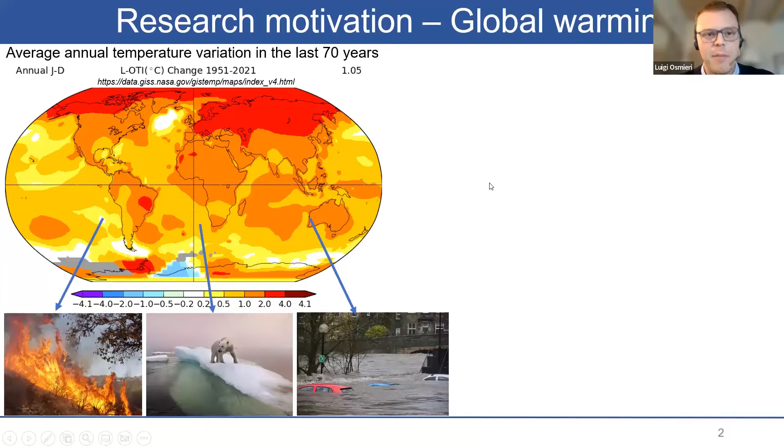So I would like to start by mentioning global warming, which is a great issue for our planet, with a lot of bad effects that are every day more evident. And the main way that we have to fight and mitigate the impact of global warming is to try to reduce the emissions of carbon dioxide in the atmosphere, which are primarily due to the production of energy. So there's a need to decarbonize our energy production system.

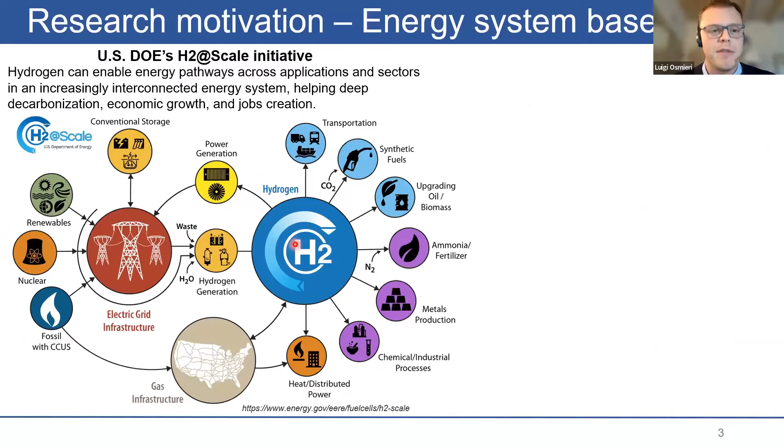And recently, the United States Department of Energy has developed the so-called Hydrogen at Scale initiative with the goal of integrating hydrogen in the energy production system and in the economy, with the goal of helping decarbonization, and which can also have a great impact for economic growth and job creation.

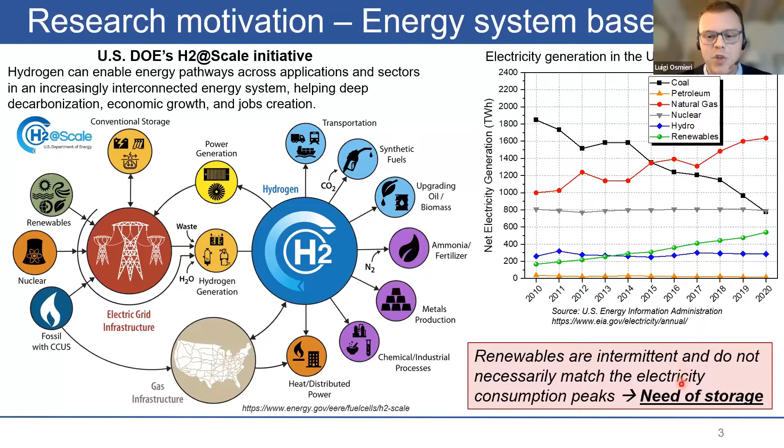We can see from this plot how the electricity produced in the United States using renewable sources over the last decade has increased. However, the renewables are intermittent. Let's just think about the solar and the wind, and they do not necessarily match the electricity consumption peaks. So there is a need to store this excess electricity produced by renewables.

And one of the ways is to use the electricity to generate hydrogen via low temperature water electrolysis. So in a water electrolyzer, we can split the water molecule into hydrogen and oxygen without any emission of greenhouse gases. The only byproducts are the oxygen and the hydrogen that, after being generated, can be stored and then used later on when we need to produce more electricity in a low temperature fuel cell.

So the electrolyzers and fuel cells are electrochemical energy conversion devices that can operate at close to ambient conditions, enabling the fast startup and shutdown of the systems. However, to operate with high efficiency, they need catalysts to enhance the reaction kinetics at the electrodes.

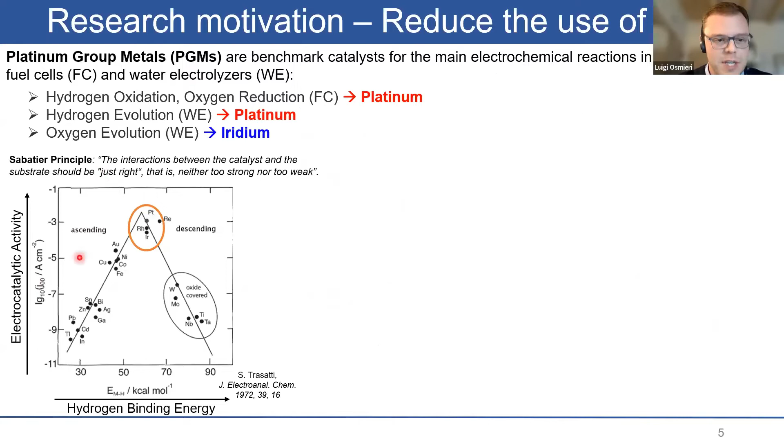Unfortunately, the best catalysts for all the electrochemical reactions involved in low temperature fuel cells and electrolyzers are the so-called platinum group metals. As we can see from this plot, they are the ones that show the best activity. But unfortunately, they are very expensive materials.

Another drawback of these materials is that they are mined in just a few locations in the world, mostly concentrated in South Africa and Russia. So trying to replace these platinum group metals with catalysts made of more earth-abundant elements will help both in reducing the cost of fuel cells and water electrolyzers, but also in reducing the dependence on import from other countries.

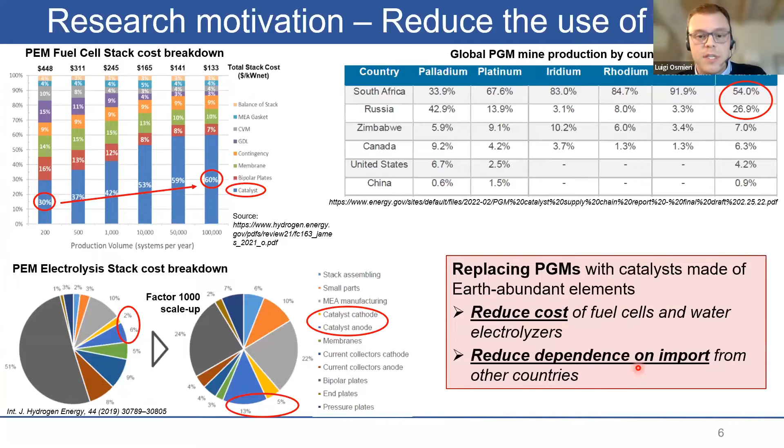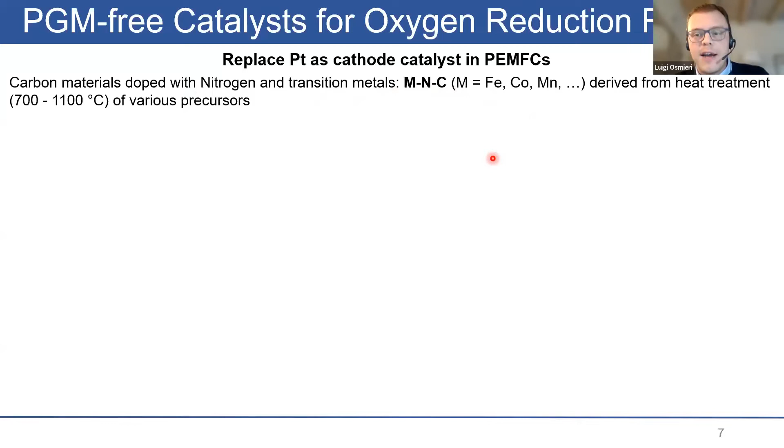I would like to talk now about my work on the development of PGM-free catalysts for oxygen reduction reaction, with the goal of replacing platinum as the cathode catalyst in proton exchange membrane fuel cells. Talking about these materials, we have to mention that they are carbon-based materials doped with nitrogen and transition metals like iron that are derived from heat treatment of various precursors.

But they are substantially different compared to the traditional platinum on carbon catalysts, primarily due to the different active sites: in platinum catalysts, basically platinum nanoparticles dispersed on carbon support, while in these materials, the active site is an atomically dispersed transition metal atom coordinated with nitrogen in a carbon matrix. In addition to this, they are also substantially different in terms of morphology, interaction with ionomer, and the catalyst layer structure in the electrode.

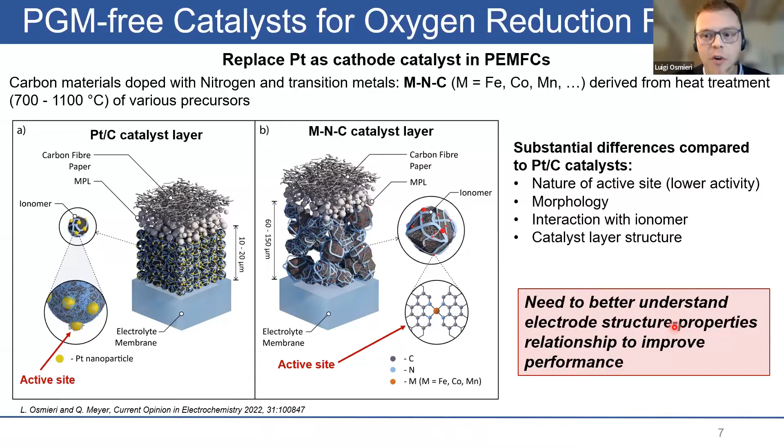So there is a need to better understand the relationship between electrode structure and properties to try to improve their performance. The first work that I would like to mention is the study of the oxygen reduction reaction kinetics of an iron-nitrogen-carbon catalyst applied on the cathode of an operating fuel cell.

Here, we try to propose a modification of a previously established equation that relates the availability of the active sites as a function of the cathode potential. We propose the insertion of two experimentally measured parameters: the iron oxidation state, measured by X-ray absorption, and the redox potential, measured by cyclic voltammetry.

After inserting this modified expression of the availability of active sites into the overall kinetic equation, we validated the model by fitting different experimental data collected over a range of operating conditions like pressure, temperature, and cell potentials, obtaining a good fitting of the experimental data.

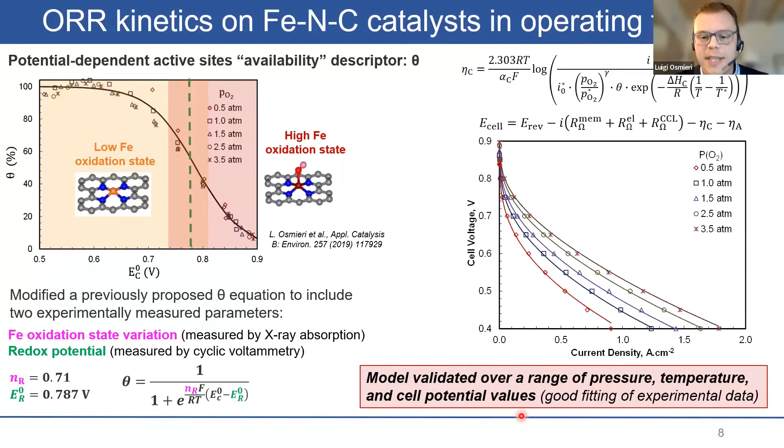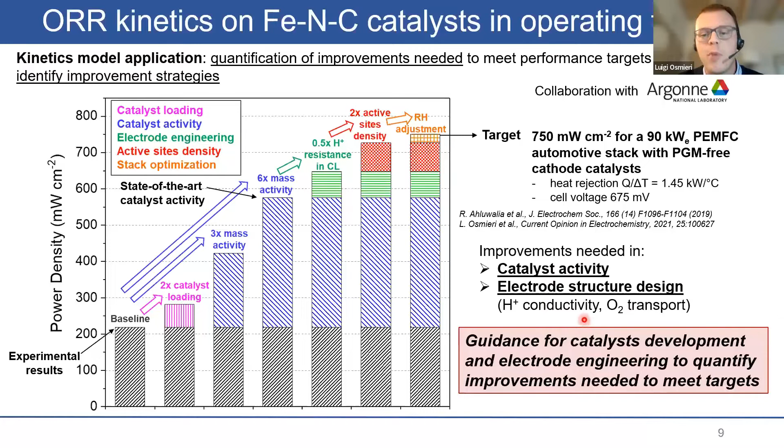Later on, this model was applied through a collaboration with a modeling group at Argonne National Lab in order to quantify improvements needed to meet certain performance targets that were set for fuel cells operating with this PGM-free catalyst. And in particular, we found out that improvements are needed both in the catalyst activity, but also in the electrode structure design to improve the proton conductivity and the oxygen mass transport.

So talking about electrode engineering and electrode design, when we prepare an electrode, we basically mix the catalyst with an ionomer and disperse it in a solvent in order to create an ink that is then deposited on the electrode.

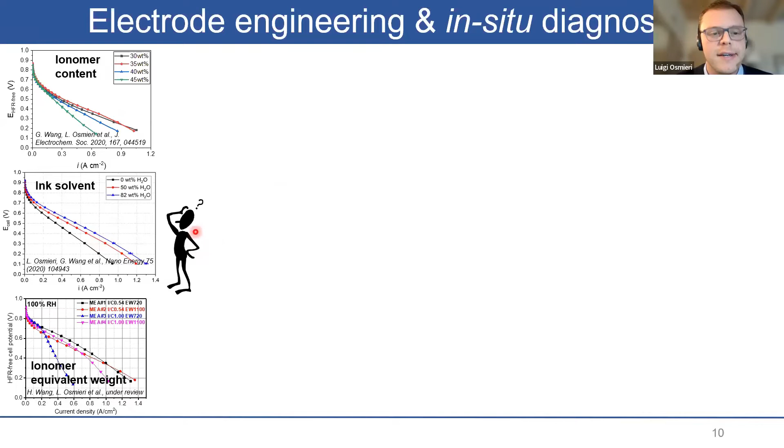We can play with different variables like the ionomer content, the ink solvent composition, or even the chemistry of the ionomer, and we obtain different performances which are not easy to explain, depending also on the operating conditions.

So I developed two methods to quantify the mass transport resistance in PGM-free electrodes based on limiting current. The first one was based on the hydrogen oxidation limiting current that does not consider the generation of water in the electrode. And then a second one was based on oxygen reduction reaction limiting current, which considers the water generation and can be more conveniently applied when this water generation is a more limiting factor for mass transport.

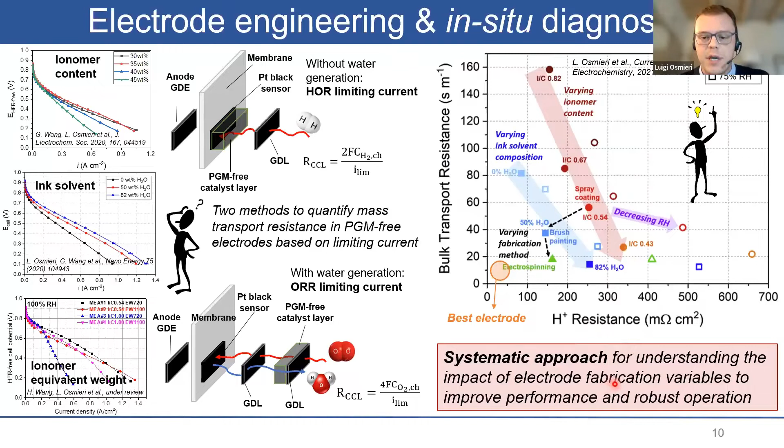Finally, I summarized the results of all the experimental tests done, changing different variables of the electrode fabrication to demonstrate that for getting the best performing electrode, we need to find a good compromise between minimizing the gas phase mass transport resistance and the proton resistance in the catalyst layer. This represents a systematic approach proposed for understanding the impact of electrode fabrication variables to improve performance and expand robust operation.

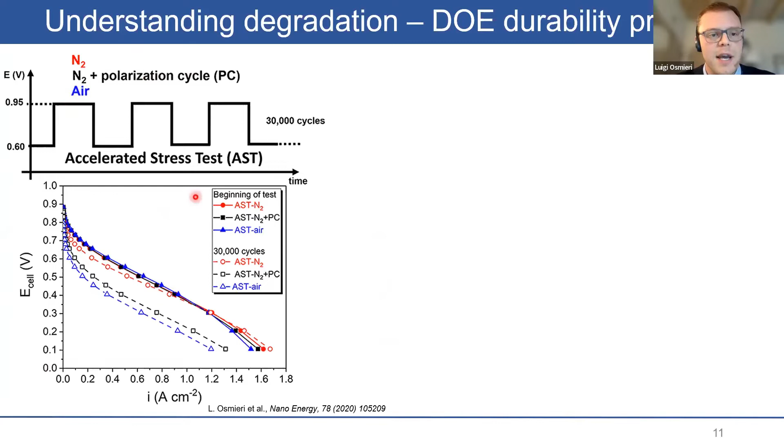Another important aspect is understanding the durability of these materials. They undergo degradation over time, and so far there has not been a universally adopted method for testing the durability of these materials. So I have tested the durability under several different operating conditions and found out that regardless of the operating condition, a good clear correlation was found between the degradation and the loss of the iron in the catalyst, and also the increasing oxidation of the surface, which all go together with the decrease in the cathode kinetics.

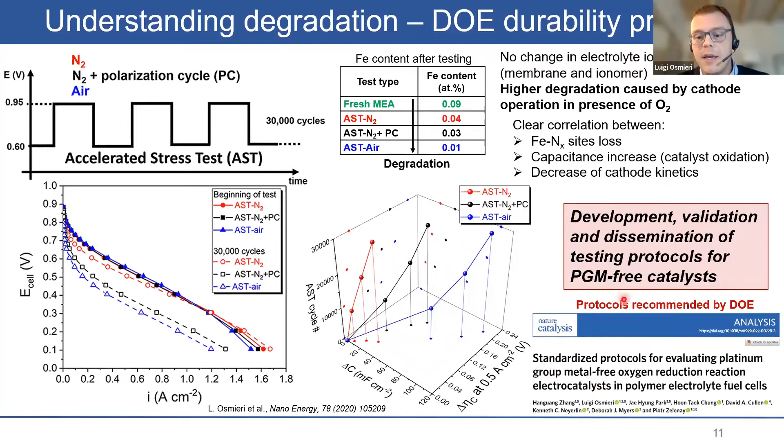So this work was used as the base for future development of standardized protocols that were then validated and disseminated, and they are now recommended by the United States Department of Energy as a testing protocol for assessing the durability of the PGM-free catalyst. And they were also published recently in Nature Catalysis.

I would like to move forward by talking a little bit about my work related to PGM-free catalysts for oxygen evolution reactions, so with application to low-temperature water electrolyzers. Currently, the two main technologies for water electrolysis are liquid alkaline electrolyzers that can operate with PGM-free catalysts, but have the drawback of operating with highly concentrated alkaline solutions and at low current densities. The other competing technology is the proton exchange membrane electrolyzer, which operates with pure water and at high current densities, but has the drawback of only working with the PGM catalyst.

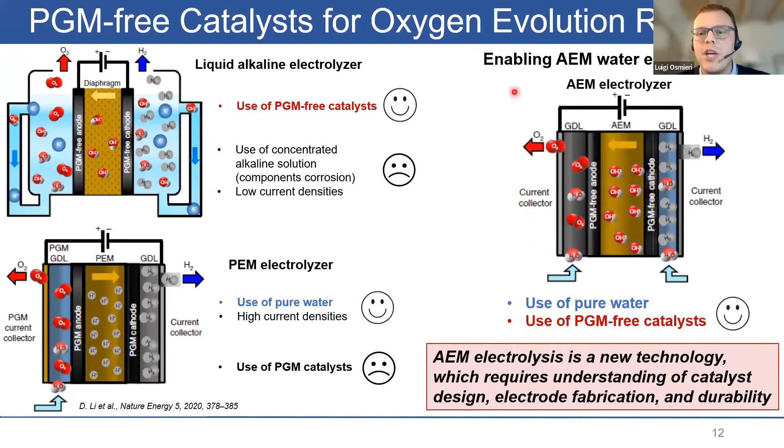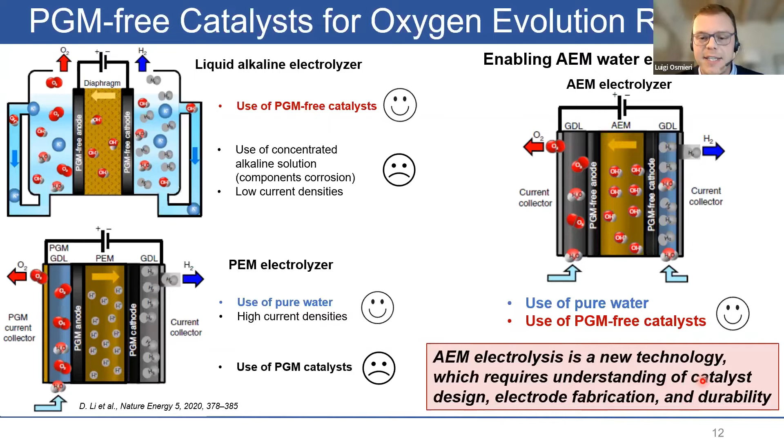Recently, the development of more performing anion exchange membranes can enable the operation of a new technology, the anion exchange membrane water electrolysis, that can combine the advantage of the previous two, so operating with pure water and also with PGM-free catalyst. But since it is a new technology, it requires understanding of the catalyst design, electrode fabrication, and durability.

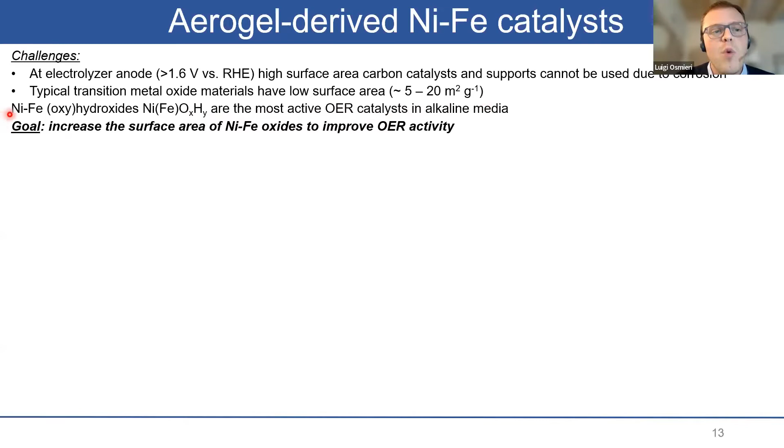The first challenge that we have is that we cannot operate using high surface area catalysts like the ones based on carbon, because the anode of the electrolyzer operates at a high potential, and then these carbon materials will undergo too fast corrosion. On the other hand, the typical catalysts used are transition metal oxides that have low surface area. So knowing that the nickel iron oxide hydroxides are the best and most active catalysts for oxygen evolution reaction in alkaline media, we wanted to find a way to increase their surface area to improve their activity.

So I developed this method based on aerogel synthesis, which consists in creating a gel, nickel iron oxide gel, and then drying it in supercritical conditions to keep the gel-like morphology and obtaining this very high surface area oxide with surface area above 400 square meters per gram. When testing it in a liquid electrolyte cell, we found out that the activity of a lot of these materials is way higher compared to iridium oxide, which is the benchmark PGM catalyst for oxygen evolution reaction. So we expected promising results for the testing in an operating electrolyzer.

However, we faced issues when fabricating electrodes with these PGM-free catalysts, because we found out that when they are exposed to deionized water, they tend to detach from the electrode. And so we proposed the addition of a binder in the electrode formulation in order to prevent this problem. When testing, we found out that changing the formulation of the ink in terms of binder content and ionomer content, the performance in DI water was varying a lot, which didn't happen when testing with a supporting electrolyte solution like 0.1 molar potassium hydroxide.

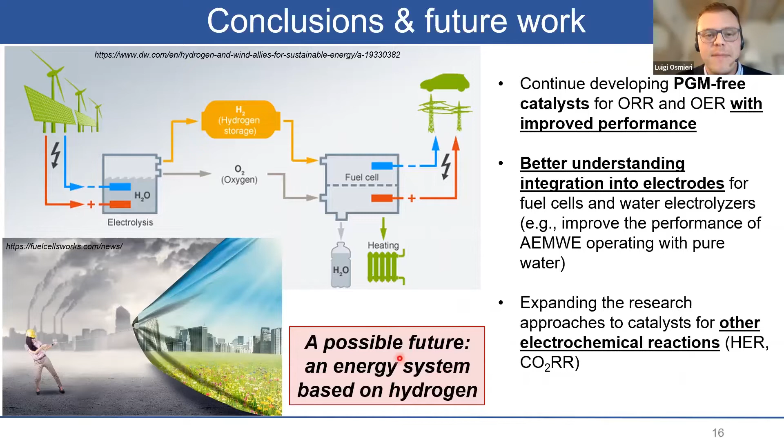Finally, I would like to conclude by saying that continuing to develop PGM-free catalysts with improved performance, better understanding their integration into electrodes, and expanding these research approaches that I propose also to other catalysts for other electrochemical reactions, will give a boost to a possible future in which the energy system will be based on hydrogen.

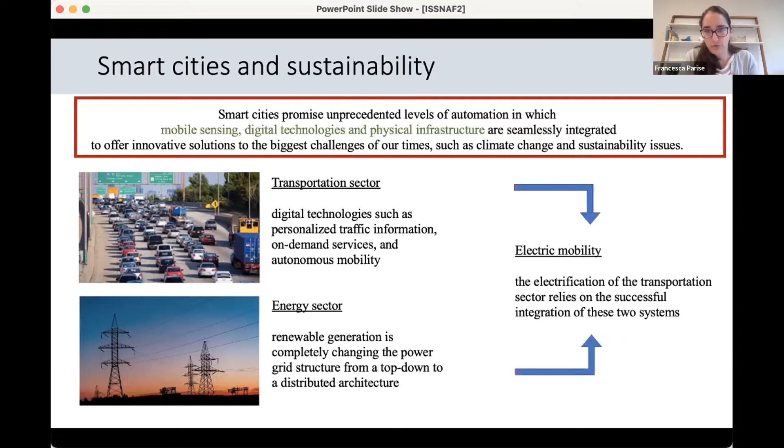And also if we think about the energy sector, especially with the integration of renewable generation, which is changing the power grid structure from a top-down to a distributed architecture. And at the intersection of the two, we have electric mobility, which also offers great promises for the future. Now, one point I want to make is that the success of these technologies really requires the development of novel modeling and control paradigms to enable their efficient, reliable, and safe operation. And this is the area of research where I focus in my group, which tries to propose mathematical modeling to understand how these smart cities operate and how we can make them more efficient.

And the challenge is that these are complex systems, so we need a number of tools from different disciplines, from network theory to model the underlying physical infrastructure, to control, machine learning, and optimization, if we want to understand how to make the system more efficient. But what I'm going to argue in this presentation is that we should not forget that the main component of smart cities is the people that live within them. So we should also think about how to model human behavior and how these people interact with the underlying technology. And I want to argue that the way to do that is through the lens of game theory. Game theory is a science that allows us to understand how people make strategic decisions.

And so to give you a little bit of a primer, suppose you have a population where you have a certain number of agents, and each one of these agents need to make a decision, which is what I'm here denoting by xi. So this is going to be the decision of agent i in my population. And when I say that agents are strategic, what I mean is that their objective here is to make the best decision to maximize their interest, which means that they want to, for example, minimize a cost function that depends on their decision xi.

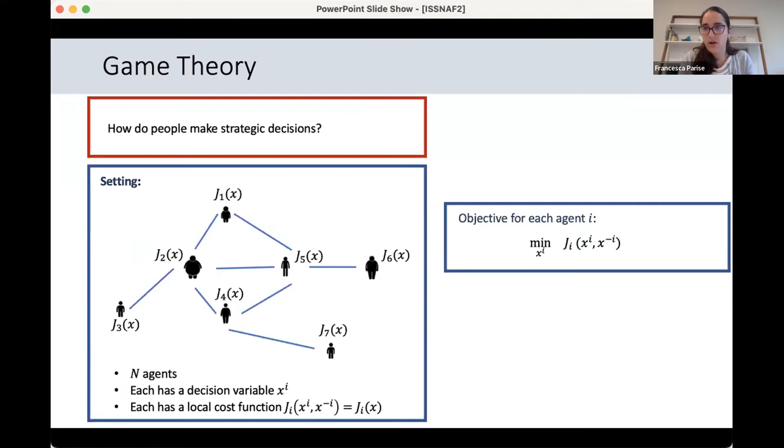And so really game theory offers a solution to that in the concept of Nash equilibrium, which was actually introduced by John Nash, who won a Nobel Prize for that. And if you don't know about his life and story, you can watch the movie A Beautiful Mind, which was about his life. And really, I would say the contribution is this concept of equilibrium, which allows us to understand what is going to be the outcome of this strategic interaction as a set of strategies, this x bar i, where no agent has any interest in unilateral deviation.

So really in simple words, it's saying that a configuration of decisions can be stable only if every agent is happy, so it's minimizing its cost function, given what other people are doing. And I want to underline that this is a fundamentally different solution concept than asking an external entity to actually solve this centralized problem of just minimizing the sum of the cost functions of all the agents. Right? This is totally different because here we're only thinking about the sum of all the cost functions, and we're not making sure that every agent is actually optimizing its own interest.

And so to understand and bring this back to smart cities and why is that important, I want to focus for a moment on application to traffic. And I want to convince you that this is indeed a game. And why is that? Because, well, we have a population of agents that need to decide how to route themselves. And so the decision that they're going to make is, for example, which route to take for going from home to work. And of course, what they want to do is to minimize their travel time.

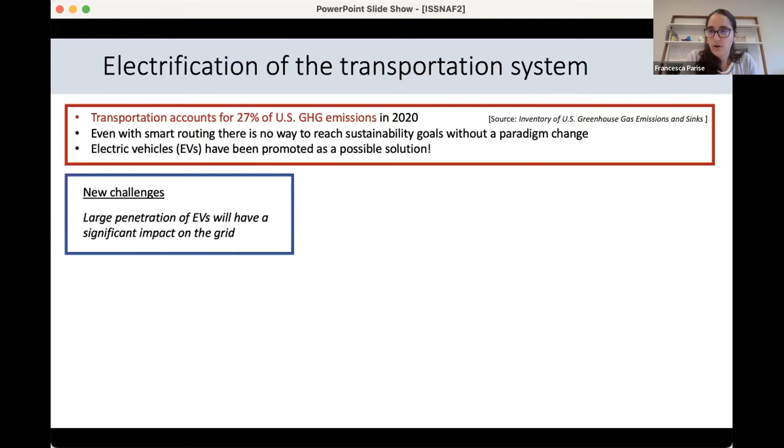And one thing that I want to mention, however, is that this comes with its own challenges, because large penetration of electric vehicles will have a significant impact on the grid. And so this is another area of research that we've been focusing on, which is trying to understand whether we can coordinate the charging requirement of this large fleet of electric vehicles. On the one hand, not to impose too much stress on the grid, and maybe at the same time to actually provide some ancillary services.

And really the key insight of how this may be possible is the fact that EV charging is what is known as flexible demand, which means that typically, for example, people connect their vehicle when they come back from work, and they really only want it to be charged by the next morning, but they have some flexibility on when exactly this charging should happen. And so the idea is, can we exploit this flexibility in order to coordinate the charging needs?

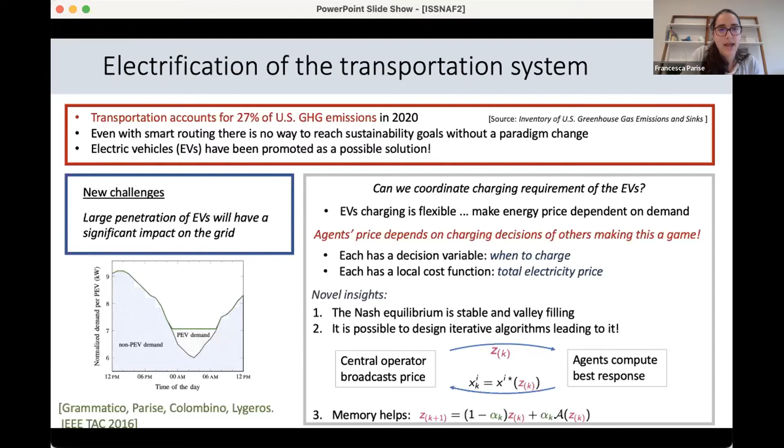And now if you do that, you see we're back in a game theoretical setting because every agent needs to decide when to charge in order to minimize the total electricity price, but this will now depend on the choice of others because that will change the total energy profile. And so in my work, we've been looking at this kind of charging game, and we show that, for example, the Nash equilibrium has this nice so-called valley filling profile, which is very desirable from the point of view of the grid. And we developed some iterative algorithms to coordinate the charging requirements of the population to this Nash equilibrium.

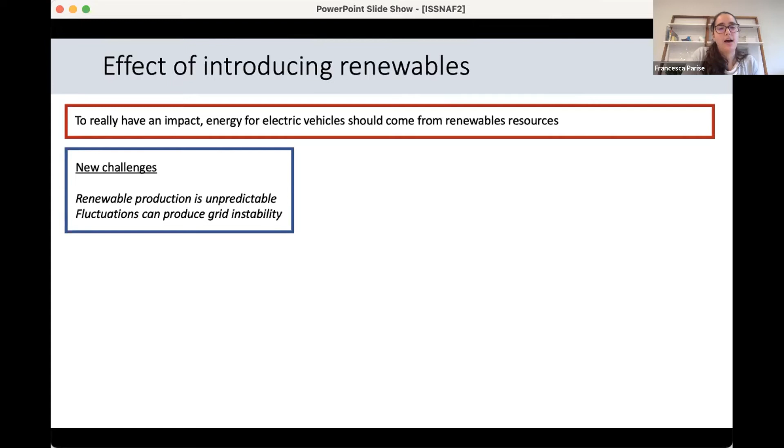And then just to conclude, this also, of course, depends on how we produce the electricity. So this will depend on the introduction of renewable resources. So another project that we work on is trying to understand how to overcome the challenge that renewable production is unpredictable. This will depend on, for example, fluctuations in solar or wind power, which can produce grid instability. And so one question that we try to understand is how to increase the robustness of the grid. And we try to use techniques from network design in order to design a better grid that is less subject to these fluctuations due to renewable resources.

And okay, so without going too much into detail, because I'm running out of time, I want to conclude by saying that what I presented here are some applications of my work motivated in this area of sustainability within smart cities. Within my group, we also have a more theoretical side, where we really look at these games and try to understand general and fundamental properties, like, for example, convergence to equilibria, generalizing these things that I've discussed for electric vehicles to general games.

And then another area that I find really fascinating is a subset of game theory where agents are interacting as given by an underlying network of interaction. And we made really fundamental contributions in understanding what are the properties of the equilibria as a function of the underlying network, and how we can get computational tractability when this network becomes really, really large. And this has more application in social and economic contexts.

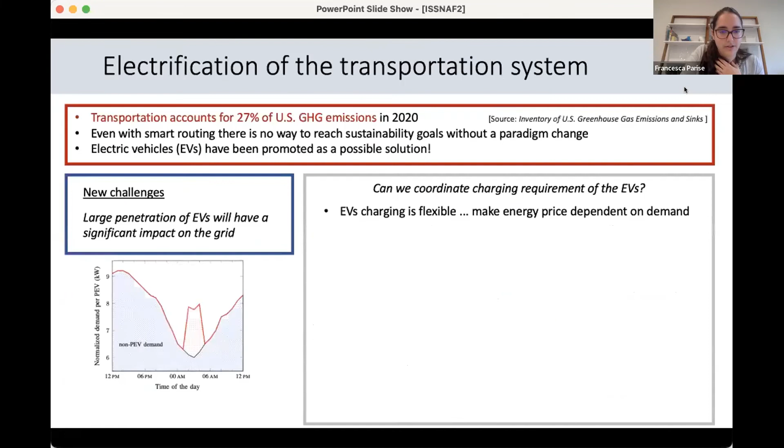But what I like about this is it shows some promise, right? It highlights a problem and some potential solutions so that hopefully people will think about this and really focus on the importance of this strategic behavior in these types of settings and really try to fully exploit the potential of these apps.

And as a follow-up, is there a way to introduce some form of, I guess I would call it either robustness or security in the algorithm, meaning that you may have found an optimal solution, but a malevolent agent could very easily completely destroy your optimal solution?

Is that something you can introduce in these algorithms? Yeah, you can do that. Of course, that's a big concern, both in these type of algorithms and also, for example, in the EV charging case. People have looked at that because, I haven't gone into detail of that, but that will require some iterative communication. And then you may think, okay, if I know when a person is charging his vehicle, I may infer something about when he's at home and when he's not, and that has some potentially harmful consequences.

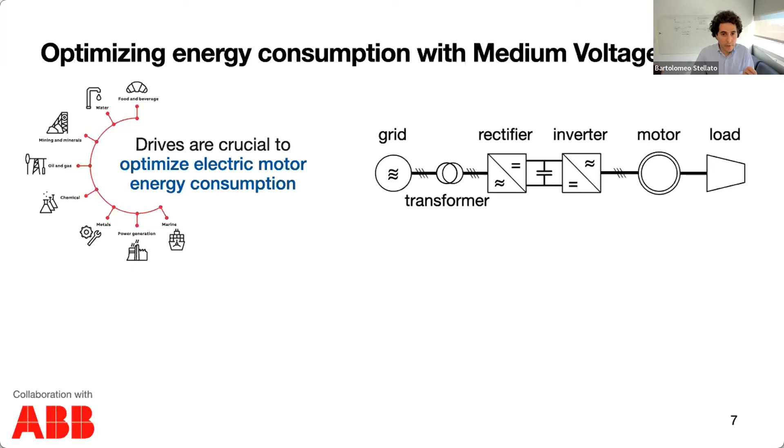Medium voltage drives are linked to several important industries, and they're within all major industrial applications that you can imagine. For example, compressor pumps for water and wastewater treatment facilities, or even fans in power stations, are operated with medium voltage drives. And they're an important component connected to the grid that is usually operated after the high voltage AC currents are rectified. And then the electric drive works by converting the DC currents into alternating currents again that are fed into a motor.

So this process has two conflicting objectives. On the one hand, we want to make the distortions as small as possible because they're responsible for the energy waste in this connection between the grid and the motor. And on the other hand, we would like to avoid operating the switches inside this inverter too often because they can heavily reduce the lifespan of the components, including the motor. And this is a combinatorial problem because the positions of the switches are integral. And not only is it combinatorial, but it needs to be solved every 25 microseconds, which is about 40,000 times a second.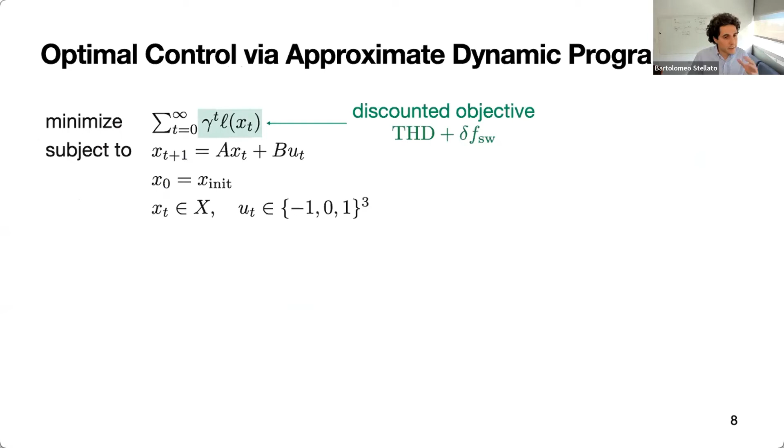Traditional approaches give up on optimization because it's almost unthinkable to be able to solve these problems, but we really wanted to use optimization and optimal control to apply the best trade-off between these two conflicting objectives. And the problem that we ended up solving was an approximation where we minimize a discounted objective over time that represents a trade-off between the current distortions and the switching frequencies. And the rest of the problem is relatively simple because you have linear dynamics, an initial state and some state constraints that are easy, but the hard part are these switch positions that need to take integer values.

So this is a mixed integer optimization problem that takes minutes or hours to solve, and we need to solve it in 25 microseconds. So what we did is first, we heavily reduced the planning cost by computing offline in a smart way the approximate value function of this problem. And then we applied the planning to a very short horizon, but exploiting this value function that represents what happens in the future.

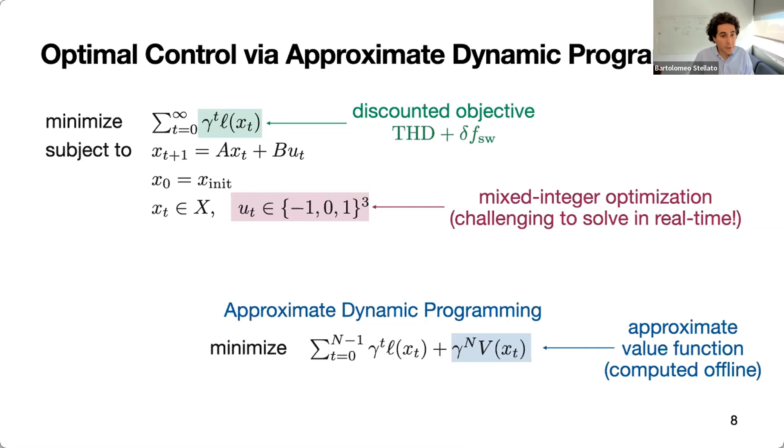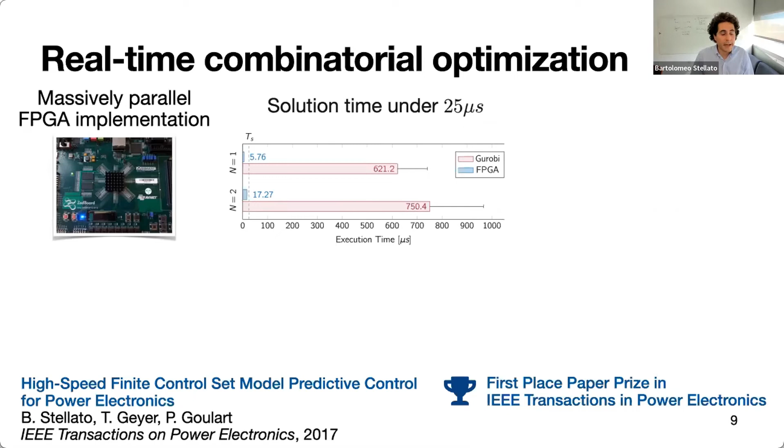This operation, combined with a massively parallel FPGA implementation, allowed us to solve problems within this target 25 microseconds and heavily reduce the computation time compared to commercial state-of-the-art mixed integer optimization solvers.

And even though it's an old problem, it has been applied in numerous applications in space, aerospace engineering, in autonomous rocket landing, signal processing, and it's also within several algorithms used in the grid. And more importantly, it is a core optimization problem that we need to solve in real-time optimization and optimal control, especially predictive control of intelligent systems. So if we're able to solve this a bit better than what's currently done, we can have a huge impact.

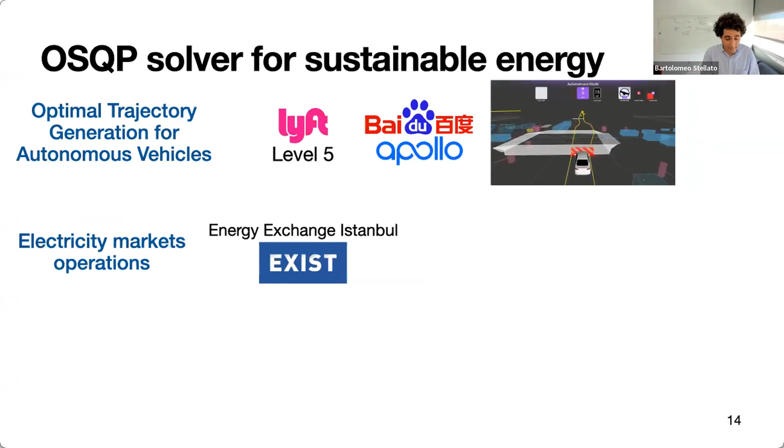Another application I'm very excited about is Optimal, which is a startup in the Netherlands that is working on the first carbon negative greenhouses, which will remove carbon from the atmosphere. They're totally operated by renewable energy and will be a sustainable way to increase and make the production of the vegetables we bring to our tables more sustainable in the future.

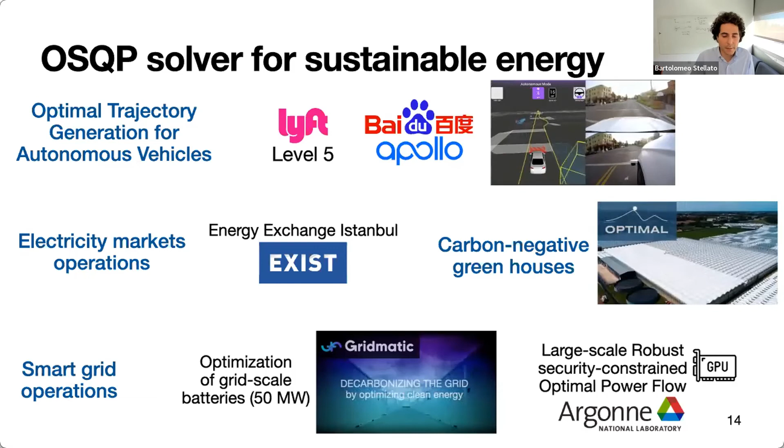Also, in terms of smart grid operations, the startup Gridmatic in the Bay Area is working on decarbonizing the energy grid by operating grid-scale batteries as components of at least 50 megawatts in the grid, and they're using OSQP to operate these batteries. And even the Argonne National Laboratory is solving these complicated problems necessary to operate the grid, the robust security constrained optimal power flow problems, where they use OSQP as a subcomponent of these algorithms on GPUs.

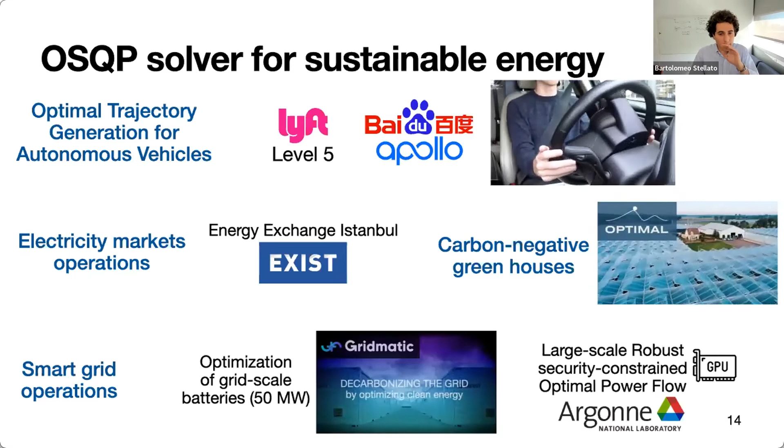So these are only a few of the applications that we have been interacting and working with, but there are many more that I believe we still need to discover. So another part that I would like to focus on now is how to make decisions under uncertainty and how this can affect our grid, or how decisions are related to sustainable energy.

And these constraints are affected by uncertainty, because this vector U is a vector of uncertain demands applied to the charging stations that we don't know a priori. So satisfying this constraint is very hard. And there's a lot of literature on solving problems with these kinds of constraints. And there are two conflicting approaches.

One is a worst case approach related to robust optimization that is very tractable, but conservative. We immunize against all the worst case values of the uncertainty in a set. On the other end of the spectrum, we have a probabilistic approach where we assume to know a family of distributions where the uncertainty lives. This is less conservative because we look at the distributions, but is intractable.

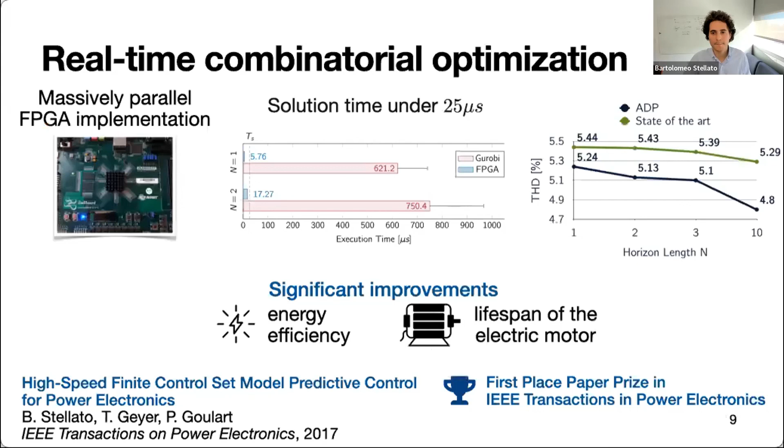Thank you, Bartolomeo. Actually, I had a quick question. On your slide 9, where you showed the harmonic distortion reduction with your algorithm. Yes, let me pull it back. This one. Yeah. So I guess if I look at the number on the y-axis, it's a pretty small percentage, and it's a reduction, but it's not huge. Can you give me an idea of what the impact of those small numbers has?

That's a good question. I would say the answer in terms of impact really depends on the model that we're using. Because this medium voltage drive can go from I would say hundreds of kilowatts to 100 megawatts. So it really depends on these models. I could tell you though that most of the papers in the power electronics community working on this topic are working towards shaving

off a much smaller percentage, because the community is focused on one-step prediction in the future. So in some sense, looking at more steps in the future is still something that they're not really aware of, while it's a very common thing in other applications of optimal control. So I would say it's hard to give you an exact number because it really depends on the model. This was on a simulation of a model that ABB gave us.

But in terms of comparing to state of the art or seeing where people are fighting to get improvements, they're much smaller usually. When you have horizon length of 10, usually you get 0.2% improvements or something like this as a normal improvement. So that's why it received a significant number of comments or citations, based on the fact that we were able to improve much more than what was considered doable before. That's thanks to optimization, I would say.